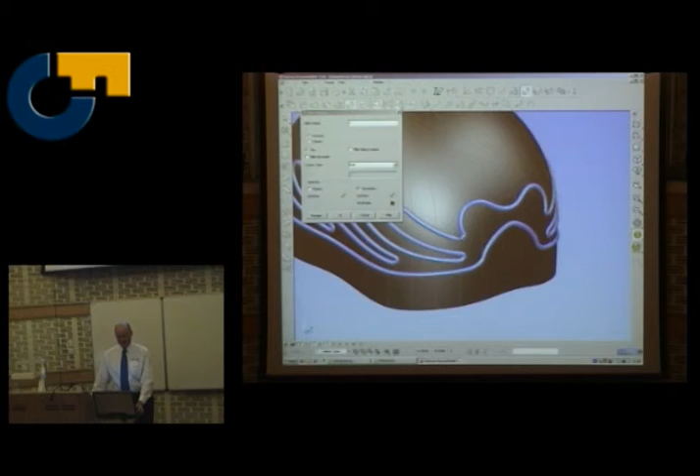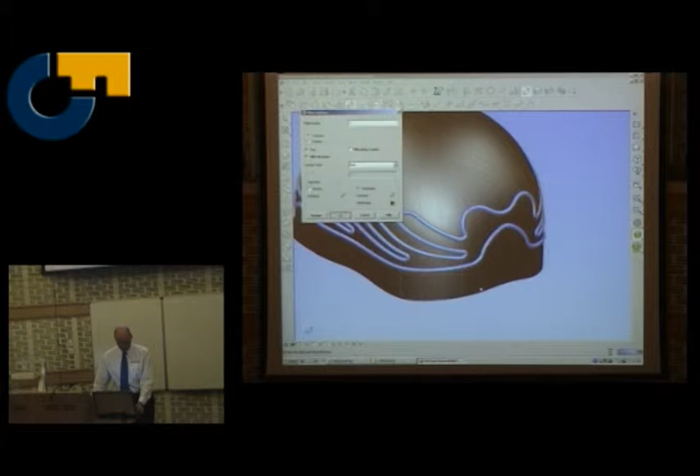Okay, and just on that note, PowerShape's got 1,000 levels. It's very rare they ever get used, but you've got control over what's displayed and what's hidden very simply in the software. Okay, so here, that's why it took so long. I didn't choose that option very well. I'm not certain this fillet will work because I didn't choose the surface creation option too well. But you can see there we've got the two tracks where the fillet will fit, and let's see if this is going to work. So I'm going to say fillet all of this together, and I'll say go.

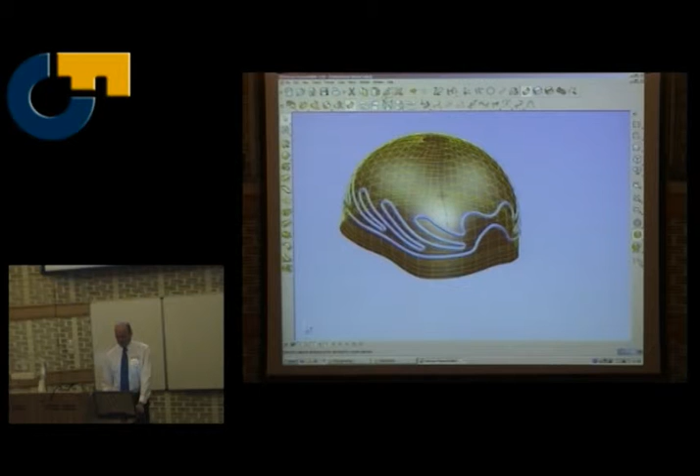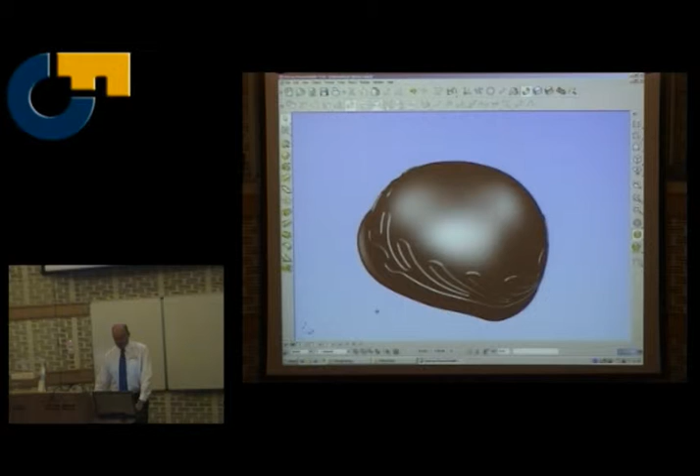That's why that took so long. I didn't actually choose the option to smooth out the corners in that surface creation, so I'll see what happens here. Okay, that has worked. You would probably make that slightly smoother than that is. But that fillet's worked, so that's actually created two fillets, one on the inside, one on the outside, and it's trimmed the whole model back, so we've still got a closed volume in there. So just a very simple custom design add-on there, just that kind of bead.

Now to introduce the tri-grid element of this, I'm just going to drag in an STL file of a skull. Now this was actually created in ArtCam. If I draw that on its own, I'll just find it, I'll spin this across. ArtCam is another software package written by Delcam. It's very good at making high detail, low height, we call it relief type data.

So something like this. This started off life as a full 3D skull. And I squashed that down, smoothed it out, returned detail to the model, so I put the teeth back in, made the eyes slightly more deep and made the nose slightly deep. And that kind of work can be done literally in seconds in ArtCam.

It's very, very fast at doing this high detail, low relief type work. Okay, now this is basically an STL model, a triangle model created on a flat base. We want to wrap this onto our helmet design. Okay, so I'm going to pick the surfaces that this is going to go onto.

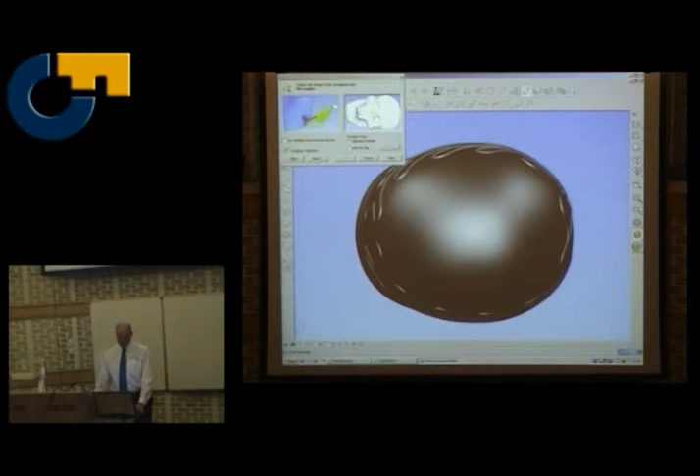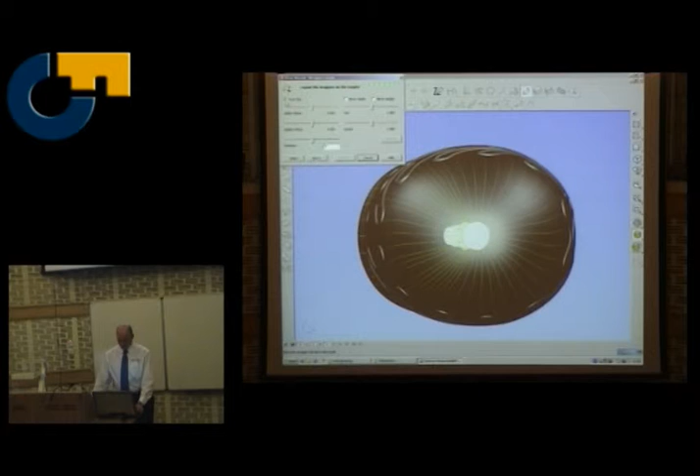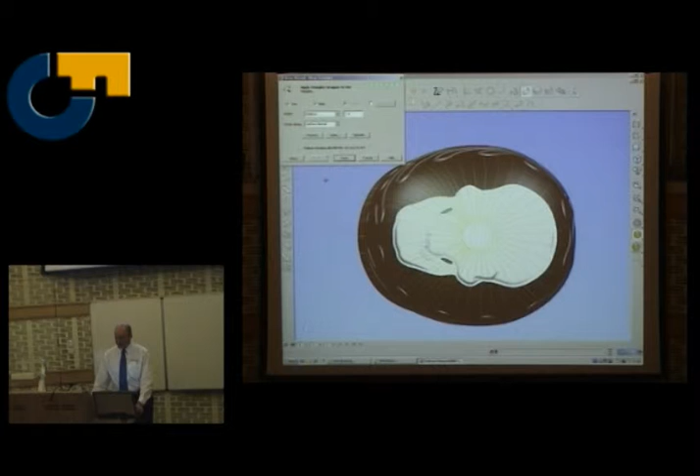And I'm going to, again, walk through a wizard which is very similar to the wizard that we used for wrapping the curve. So identify the triangle model, we create a coordinate system. Again, we get the opportunity to minimise the distortion with the wrap map. PowerShape again shows me an image representation of our STL model, which gives us the chance to change the location, change the size, to spin this around if we need to.

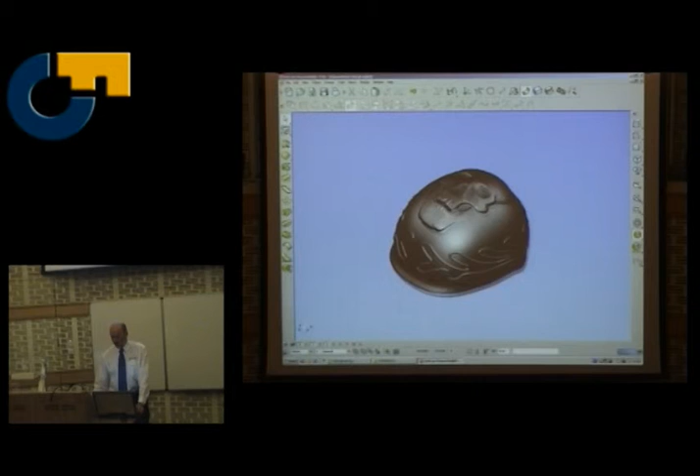When I've got it in the right place, I can say I want you to trim that, because again we want a closed volume, and I'll say OK. So PowerShape now wraps that triangle model onto the surfaces, and that's the result we get. Okay, so a bit of a Harley style design.

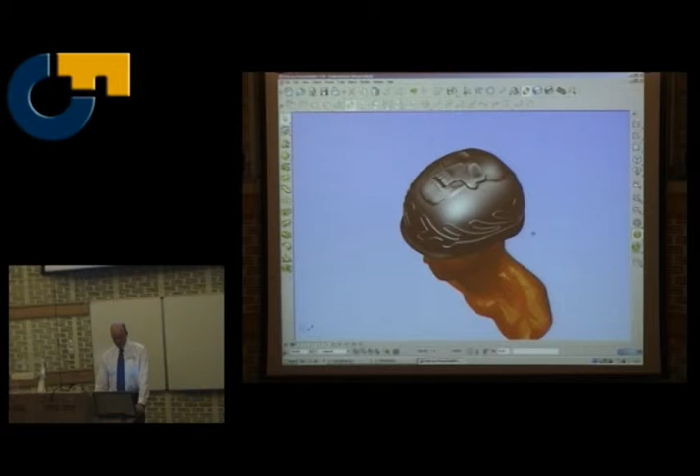If I draw everything together, I've still got the other triangles in there, but this is now a mixture of surfaces, solids and triangles all combined to make a custom product, a custom lining and a custom outer for the helmet. Okay, so that's the end of that little presentation. So, are there any other questions?

How hard is it for user scripting functionality there, so that I can take a library and just say batch produce all these as a user? It's behind PowerShape. There is a language, a macro language, and we have hooks for programming languages as well. So you can actually capture the creation commands and build your own VB or C applications that hook into the software. So we do that quite a lot.

So, is that user accessible, or is that something? Yeah, it's user accessible. Obviously, you need to understand VB6, VB.NET, C++, but actually capturing the commands in PowerShape is quite simple, and there is full documentation of all the macro language in the software. So we have a lot of users that do that for themselves. Any other questions at all?

Yeah. When you've done the conformal intersection, how were you producing the actual parts themselves? We've got a customer that does this. In India, it's a company called Vega, and I did ask somebody that question, and I've forgotten what they said. I think they actually machine a soft material to make the mould of the inside of the helmet, and then they vacuum form over it, I believe.

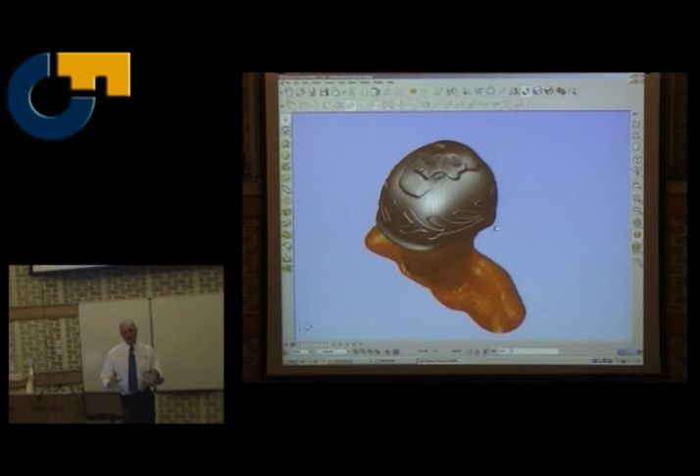I'm not actually certain, I did ask that question, and I forgot what the answer was. But I know there was some machining involved and vacuum forming, so... Do you have any idea of what the difference in cost would be between, say, producing the one you've just done there and buying one off the shelf, so to speak?

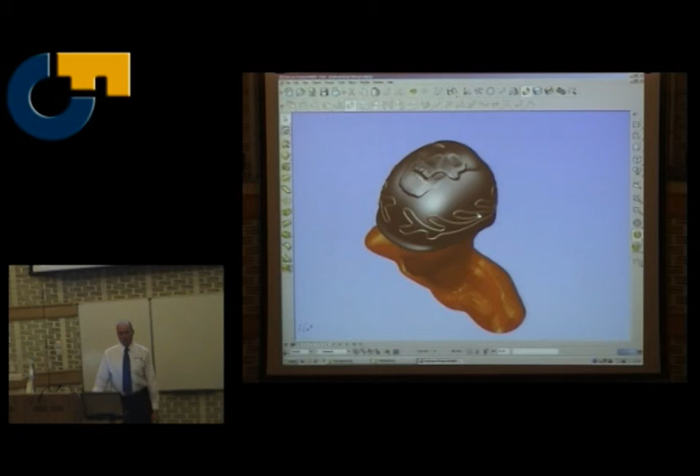I don't. It's obviously a lot more expensive because every one's unique and there's labour costs involved. I mean, the company that we have doing this with our software is called Vega, and they're based in India. So I guess their production costs are lower, so they actually sell helmets around the world. You see them advertising in motorcycle magazines. But I don't know actually. Obviously, it would cost a lot more.